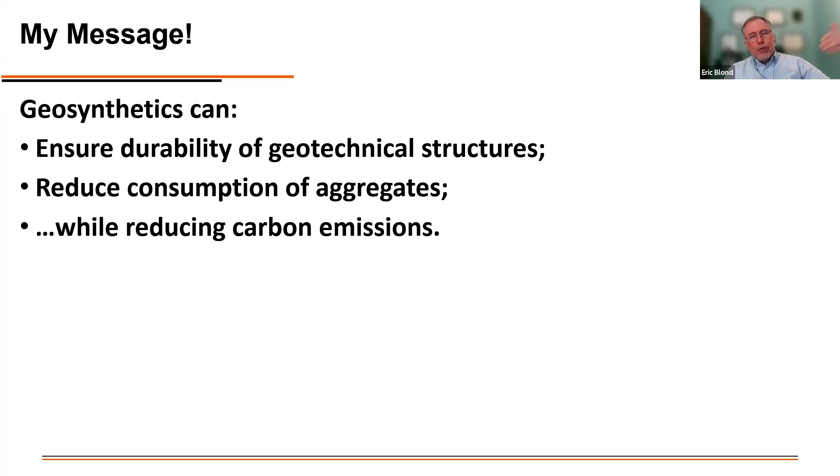Key message I'm going to try to transfer to you, so you know exactly where I'm going. Geosynthetics can ensure durability of geotechnical structures. They can reduce consumption of aggregates while reducing carbon emission. That's really where I want to take you today, with illustration, information, and more details.

Where do we start? We start by the fact that we are building infrastructure to deliver function, a road, a bridge, a wall, whatever. And if we don't do proper management of water in these structures, we will see premature degradation of these structures. Very often, engineering is focusing on bearing capacity, on strength.

We like numbers, we like kilonewtons, kilopascals, but there is the tendency to forget the water. Or sometimes what I've seen, which I think is even worse, is a drainage factor, to have a reduction of a modulus or a reduction of trafficability of something based on the quality of the drainage. This is not correct. Water shall be removed. We shall have zero saturation in a structure to make sure that it's going to perform well.

And then we design for it. We cannot play with numbers with water or no water. There must not be any water, period. That's a prerequisite, like we need to have a foundation to build a structure. We need to have no water in the structure so it can last. It's exactly the same level.

What are the effects of water on soils? Just going back to the basics, negative effects of water on geotechnical structure. If you have free water, if you have saturation, you're going to have some lubrication of the grains, and therefore you're going to reduce the strength, the shear strength of the material. So the bearing capacity is going to reduce just because it's saturated.

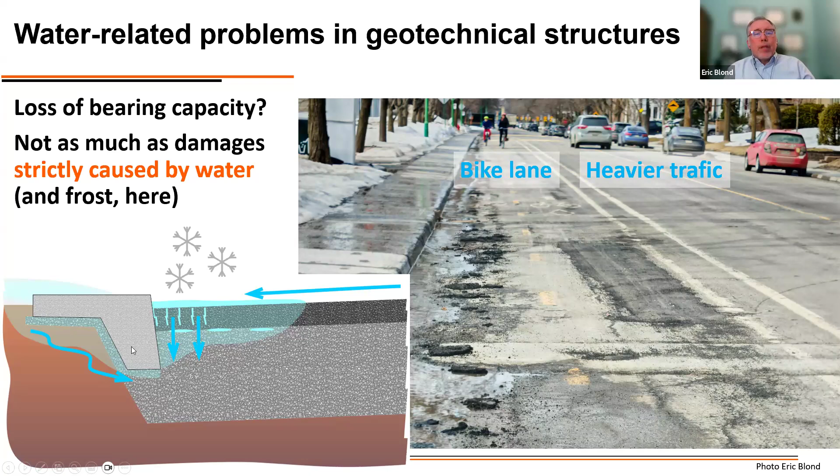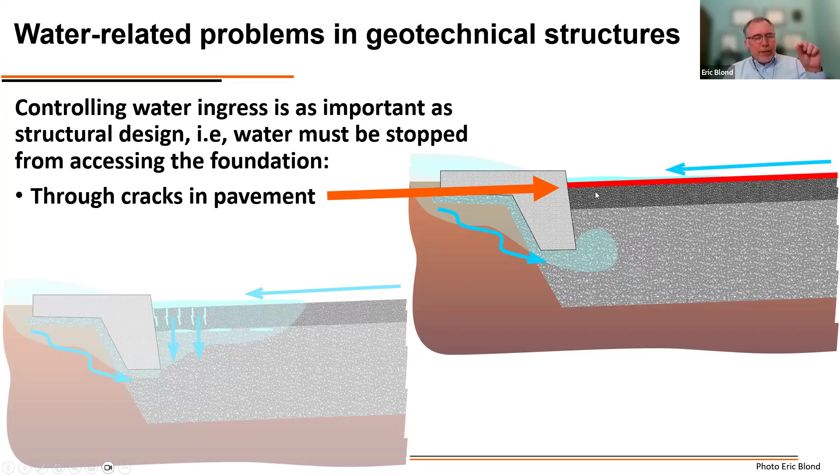So controlling the water ingress is as important as the structural design. As I said, water must be stopped from accessing the foundation. First thing first, we can install a sealing layer on the surface of the asphalt concrete. Or we can install 200 millimeters of asphalt, a very thick layer, or a geotextile or waterproofing layer that will seal the asphalt concrete. By geotextile, I mean paving fabrics, impregnated geotextile saturated with bitumen.

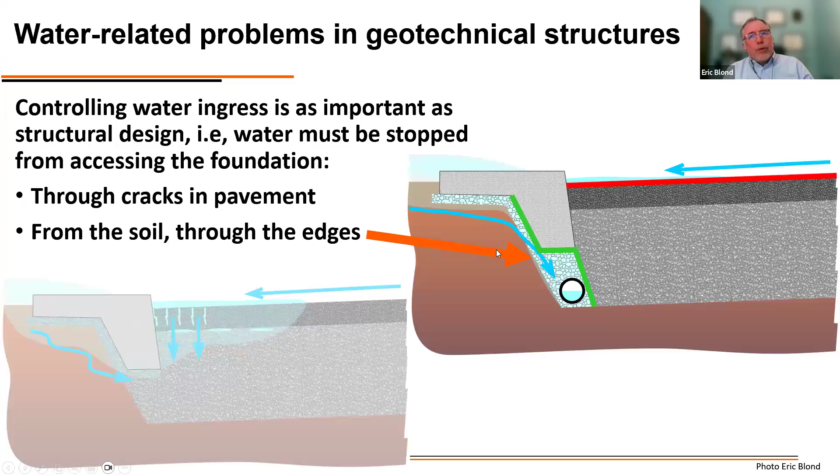Other solution to reduce the water ingress into the structure: drainage. So I'm drawing here a red line for waterproofing and a green line for drainage. And here we're having some drainage situation with gravel very often, but sometimes geosynthetics, where we're going to collect the water arriving from the sides to prevent entry into the structure.

Another important thing is that we cannot fail in one location. If we have one location on a structure which is degraded, like a pothole, the entire structure is degraded. The serviceability is reduced as a whole by a lot more than just the surface. A road with 1% of the surface exhibiting potholes is in bad condition. It's not 99% good condition, it's 100% bad condition because of 1% potholes.

Now, if we look at another type of structure, retaining walls. We design the walls - the structural capacity of this wall depends on the horizontal stress that will come from the soil behind the wall. And this stress depends on the properties of the soil with the coefficient of lateral earth pressure.

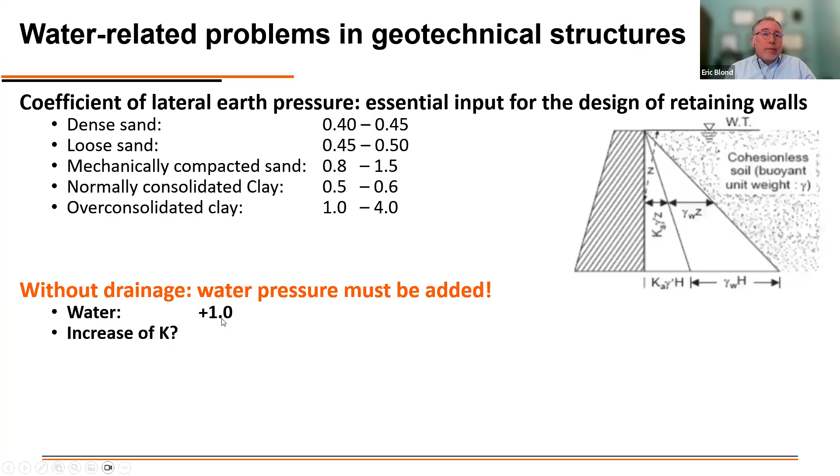However, if there is no effective drainage, this changes completely. So we can first add the weight of water, and the water may also affect the value of this coefficient. So that's how we get into some situations where the stress is increased by a factor of up to 2 or 3, and that may actually create some degradation of structures.

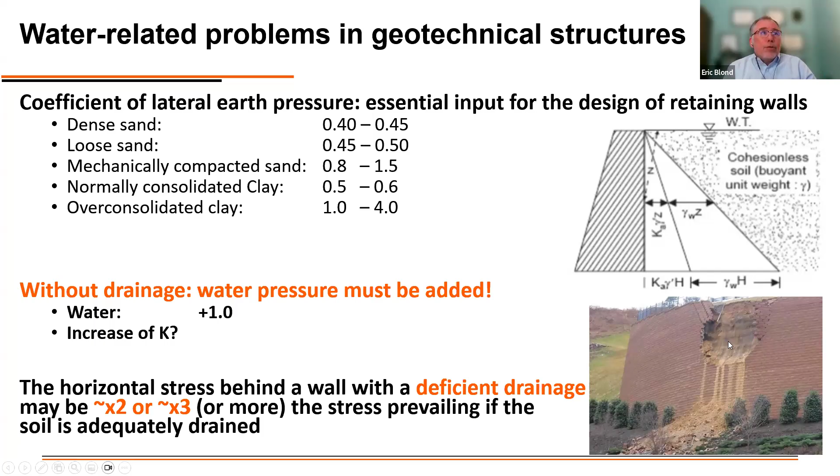There is a very good paper by George Koerner, which summarized research that involved, I think, between 200 and 300 situations. Some very important numbers are in there. Up to 2% of walls are actually failing. There are some levels of failing - not a complete failure all the time, but some level of dysfunction of the walls is observed for up to 2%, which is extremely high. It should not be that high.

Out of that, 64% of the failures are water related. Water can be many things. It can be plumbing, so a pipe with water circulating that breaks. It can be too much accumulation of water in the backfill. It can be whatever. But it's still 64%.

So that's really a good example of how the water can affect the performance, because I'm sure that all these walls were properly designed for reinforcement. It's typically not the reinforcement which is not strong enough. And in fact, in the paper, he indicates that no failure was caused by improper manufacturing of the geosynthetic used in the walls. It's really, really mostly about water and water management.

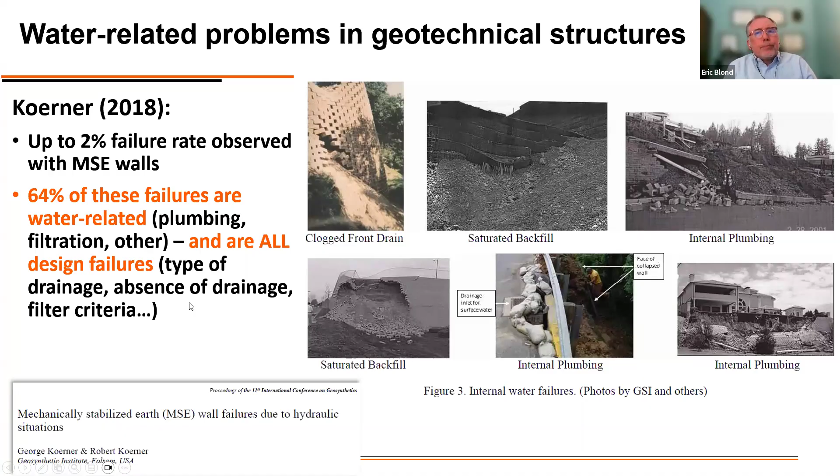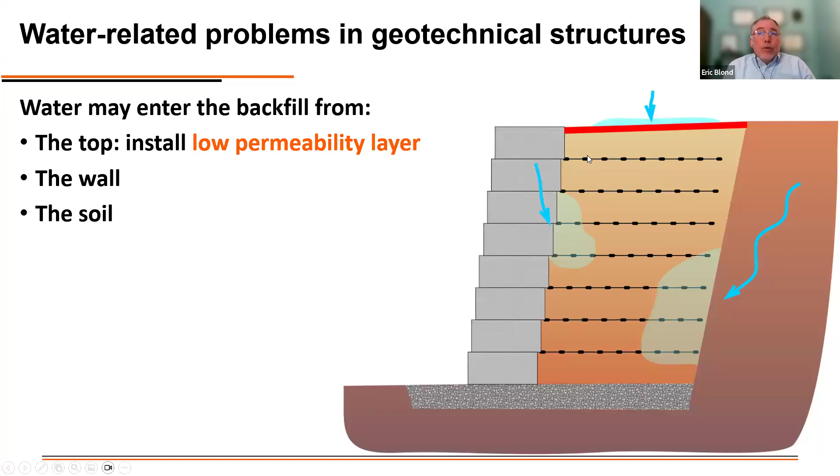So what do we have? Where do we have water in such structures? We have water which can arrive from the top, from the front wall, and from the back wall, essentially. So how do we do that? We have to install a low permeability layer on top. And on the walls, we can install drainage behind the blocks, which is typically going to be gravel, and some drainage geosynthetic, geocomposite in the back, that will prevent water entry into the region that must be stable.

Another type of structure where we can have water damage is cover soil on top of geomembranes. When we have a slope, the porous soil, especially after construction where there is no vegetation, is going to accumulate some water. Water will infiltrate into the structure, and if there is no adequate high flow component on top of the geomembrane, water will accumulate there. Eventually the saturated region coming from the top of the soil will meet the water table on top of the liner, creating an entirely saturated region that will be eroded and can fall down the slope.

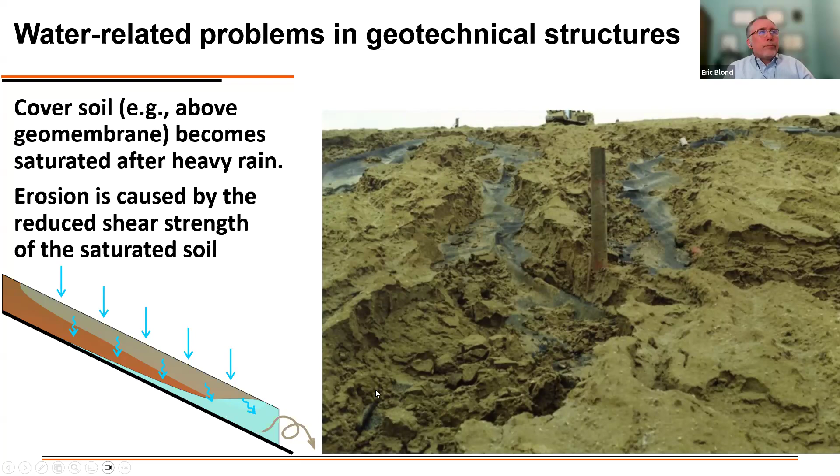To prevent that, we must have a drainage system. This is well known for such structures, but still it's one of the typical situations where we need a drainage system.

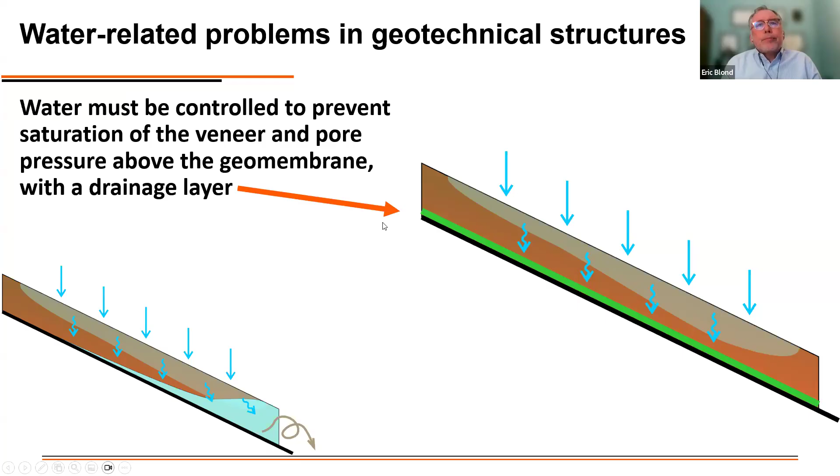Another example of failure is internal erosion. There are plenty of situations where internal erosion leads to failure of a structure. This one is a massive, huge one that took place a long time ago, about 30 years ago. What happened here is that a concrete structure was built, and compaction of the soil near the concrete structure was very difficult to do. So some piping started to develop around the structure, increasing the gradient, and that was a progressive erosion that led to the failure you can see on the right.

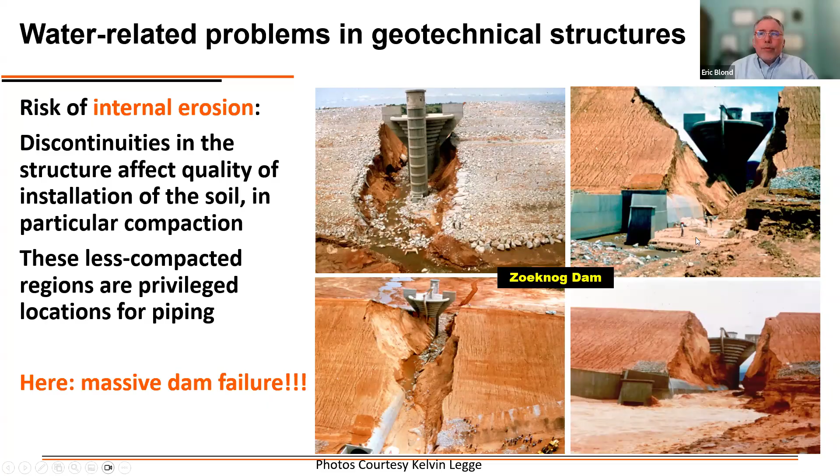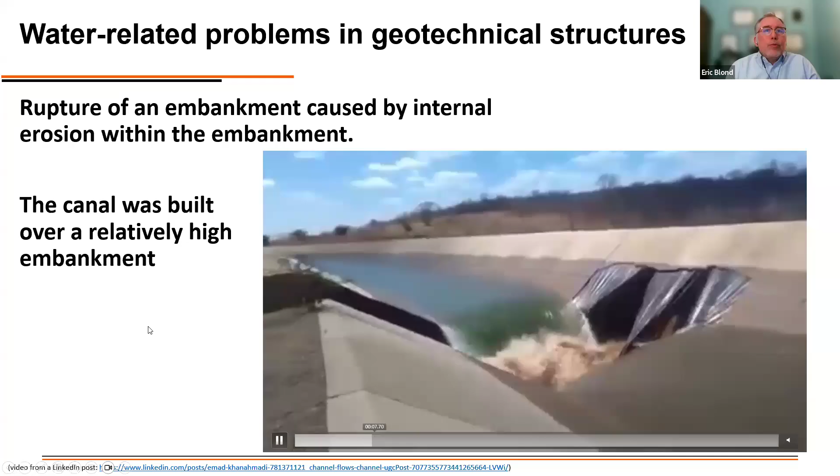Now I have a nice video to show you of a failure of a canal that was built. You see the water falling, so this canal has been destroyed. Obviously there was a hole into the geomembrane. What we see here is that the canal was built on top of a relatively high embankment, and there was no drainage underneath. So what happened? A simple, very small leak in the geomembrane, because there were a couple meters of water,

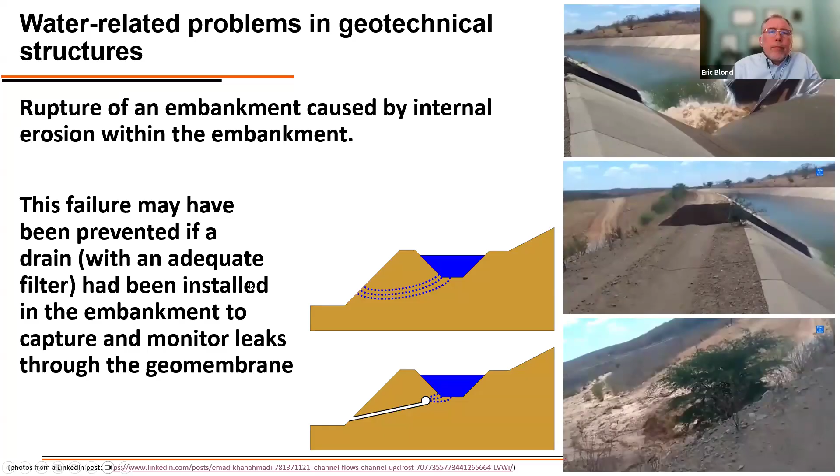So internal erosion of the soil is a problem which must be controlled, but we can also have surficial erosion. Erosion usually starts very slowly - some water takes a little bit of material, and it doesn't seem important, but it progresses, accelerates, and eventually you get to a situation where the soil has disappeared. With the rise of sea level, climate change, and its effect on the intensity of rains, those situations with surficial erosion will increase a lot.

As a parenthesis, in Quebec we have a situation where floodable regions have been updated, and this has a tremendous effect on insurance cost. Some regions cannot be insured anymore, homes cannot be insured anymore. So a lot of people will be in a dire situation because of this change in conditions - erodibility, flooding, etc.

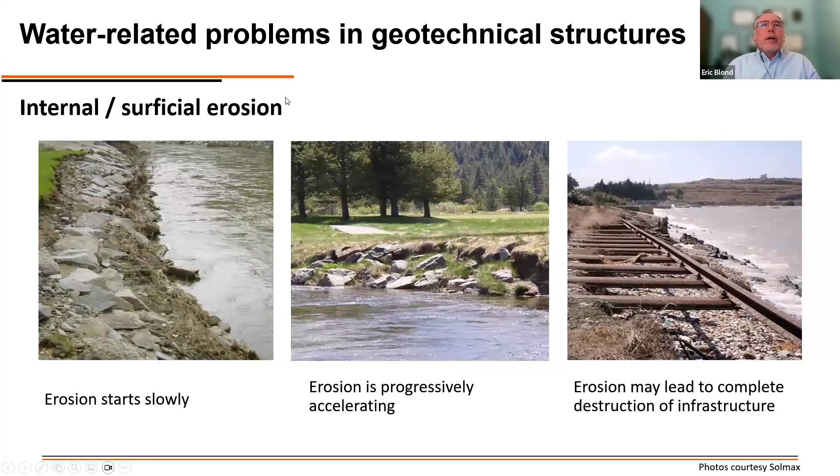At the end, what's important is that when we design a structure as engineers, what is absolutely critical beyond adequate sizing - which is the obvious thing to do - we are engineers, we do size structures, but what we must never forget is to analyze where the water is, where it's coming from, and make sure we eliminate entirely any free water in a structure we want to last, or at least control this water. We prevent excessive pore pressure and we prevent internal erosion. This will absolutely affect the durability of these structures.

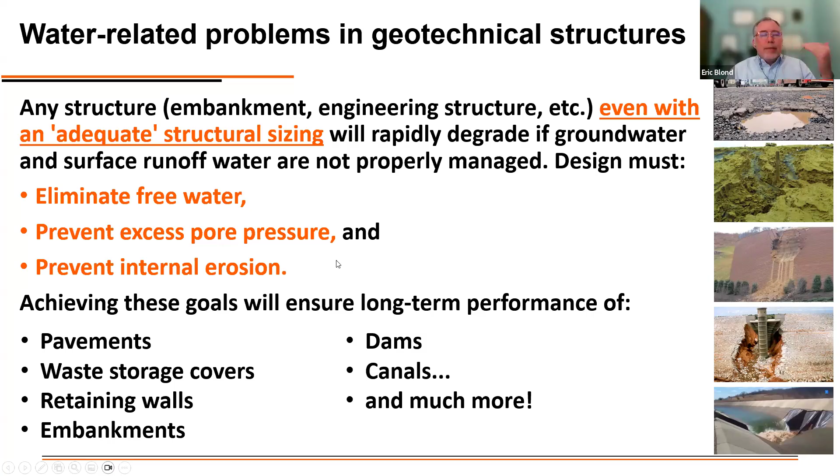In fact, as I said a bit earlier, traffic in that case has no real impact on the rate of degradation. What has an impact is the presence of water. It's only the presence of water.

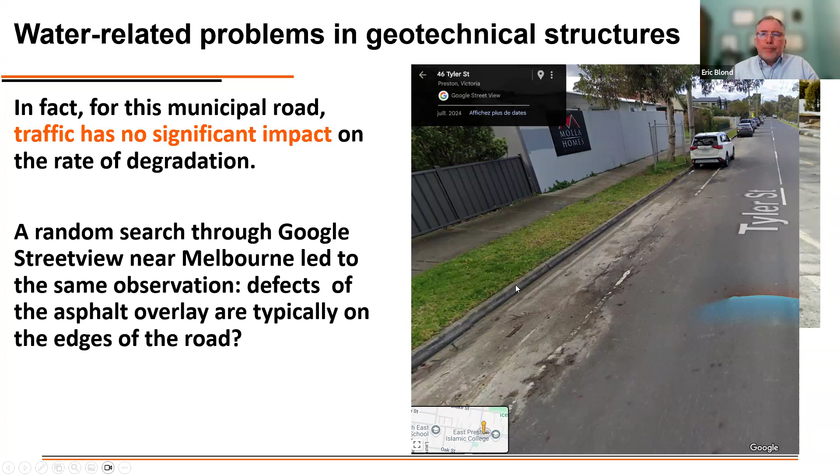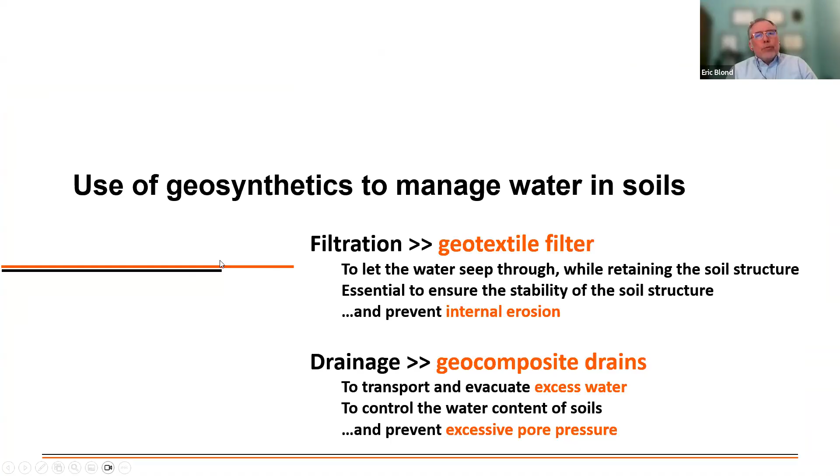So we have geosynthetics. That's fantastic. We're going to be able to use these products to address the water problems that we observe in soils and in structures. The two things that we do that we're going to focus on are filtration and drainage. But before I get there, I want to show you something that I've analyzed on what are the function and the role of geosynthetics in structures.

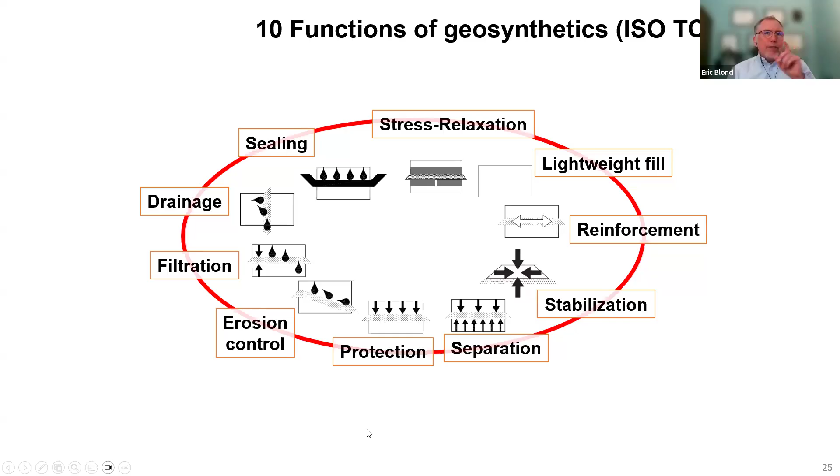If I look at ISO TC 221, the work group 6 has defined 10 functions for geosynthetics. I put them, it's not random, I put them in a very specific order around this circle to look at how we can coordinate everything. First thing, I put geotextile. How can we distribute geotextiles around this round of functions?

So we can see that woven geotextile can do stabilization. I should start here. Geotextile filter can do filtration. Geotextile cushion will do protection, separation, obviously. Woven geotextile can do stabilization. Paving fabrics, so saturated geotextile, bitumen saturated geotextile will do sealing, and we can have stress relaxation product, stress absorbing membrane interlayer. That will also help with the performance.

Now we have drainage products. In blue here, geo-drain, geopipes. We have for sealing geomembrane and GCLs. I could have put them in two different boxes, but it's not really important. For geogrids, we can have geogrids that will do reinforcement and stabilization. Geocells that can do stabilization as well as erosion control. Erosion control mats and blankets can be obviously used for erosion control as well. And we have geofoams for lightweight fills.

What I realized is that, in fact, we have three categories of function. One is water management, and it's a big one. Another one is structural integrity of the structure. And the last one is structural contribution. And in fact, if I harmonize the color codes, we can see that in green here, I've put everything which is about preserving the structure, preserving the integrity of the structure, making sure that the structure is not moving, there is not too much rutting, we control the erosion, etc., etc.

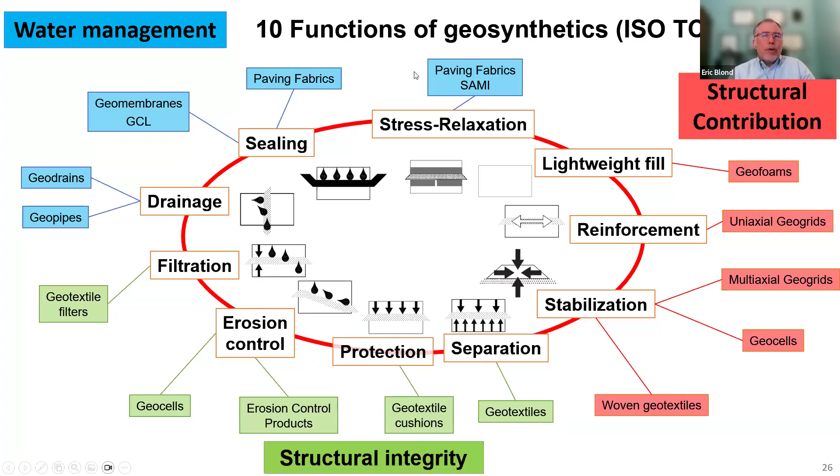So it's really about protection. Another one is water management, and water management includes both drainage and sealing, obviously. We are controlling the water. We stop the water and we remove the water. And the last one is the structural contribution. So in fact, we have three categories of products with geosynthetics. And what I'm going to discuss today is really focusing more on water management and somehow on structural integrity, which includes filtration, as I will explain just now.

So when we use geotextile for filtration, what we want to do really, it's not about water. It's not about water flow. It's about preserving the integrity of the structure. We want to retain the soil skeleton. So the soil skeleton, which maybe it's important to precise that the soil skeleton is the type of grains within the soil which are used by the stress to be transferred from one side to the other.

So that means that what is not the soil skeleton, if it's lost, like we can see here, those two cavities here, it is lost. The particles are not there anymore. They have passed through the geotextile, but the coarser material, the skeleton, is still there, which means a stress can still go from this location to that location, and that means the structure will be preserved, will function properly. The water can flow. We have now a very porous area here, and so the water can pass through no problem, but the soil skeleton is preserved.

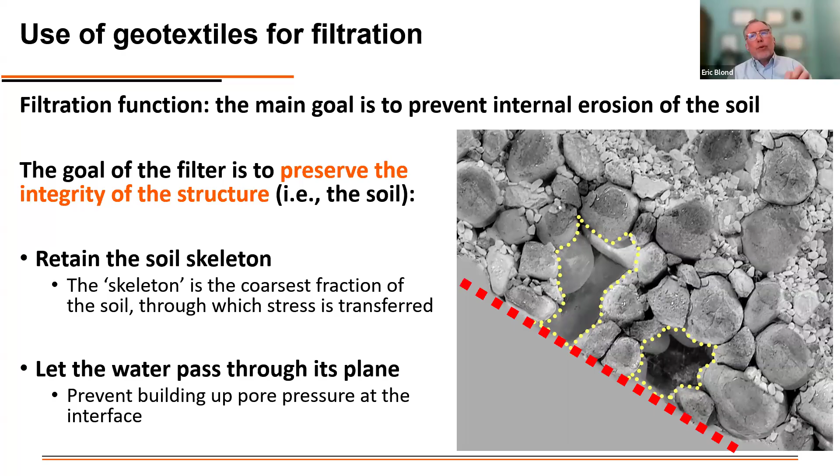So with that, filtration is really an integrity function. We are preserving the integrity of the soil structure, and we're letting the water pass through the fabric. When we use geotextile for drainage application, we're going to typically use French drains. So that means we have a geotextile filter, we can see on the right here, which is used in combination with aggregates in that case. So the aggregate is the water transport function, while the geotextile is a filter, which ensures preservation of the integrity of the soil.

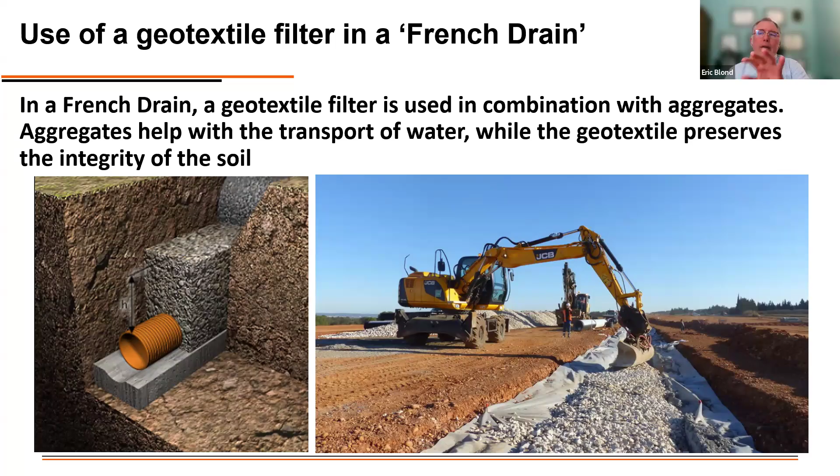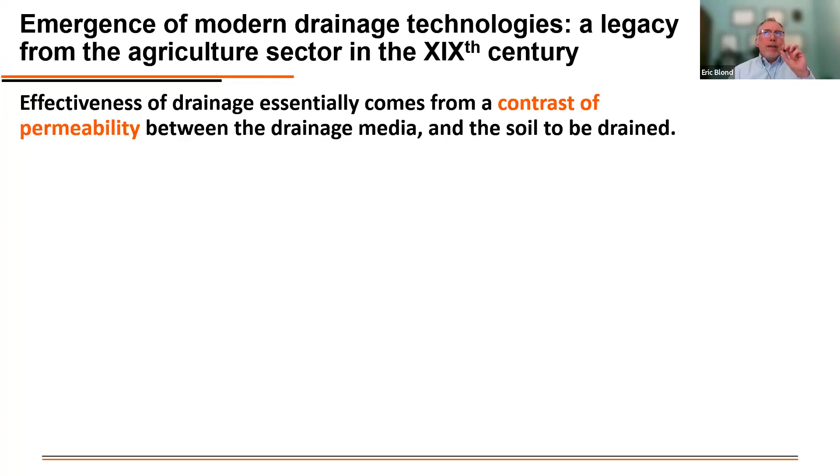Putting a channel here would lose a lot of land, and especially at a time where everything was done with horses and oxen, you don't really want to have so much space wasted—that's more transportation, etc. So he found that putting some tiles and covering them with straw would provide an excellent solution for draining water and lowering the water table in soils, and that was the way to go.

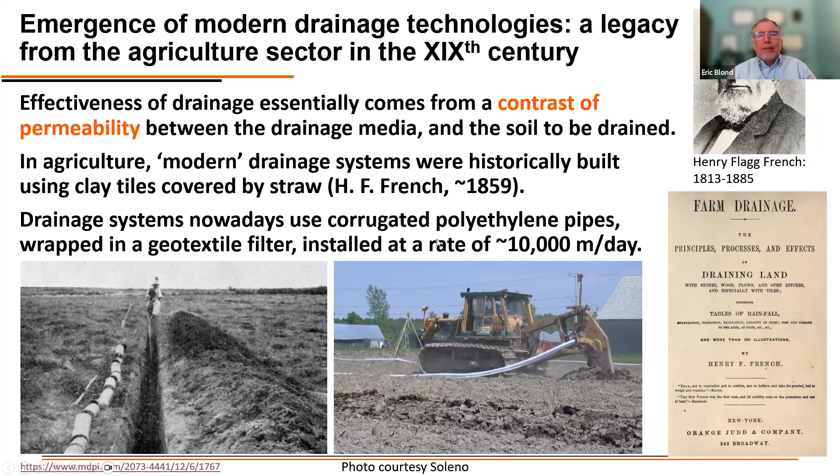So that's really the origin of the modern drainage system. Now let's look at what's happening in dams. I use a dam because it's an interesting application—dams are probably the most critical application with respect to water management. We want to contain water, so the purpose of a dam is to contain water, and we want to make sure the water is not going to destroy the dam. So all the design of a dam is based around water management and erosion.

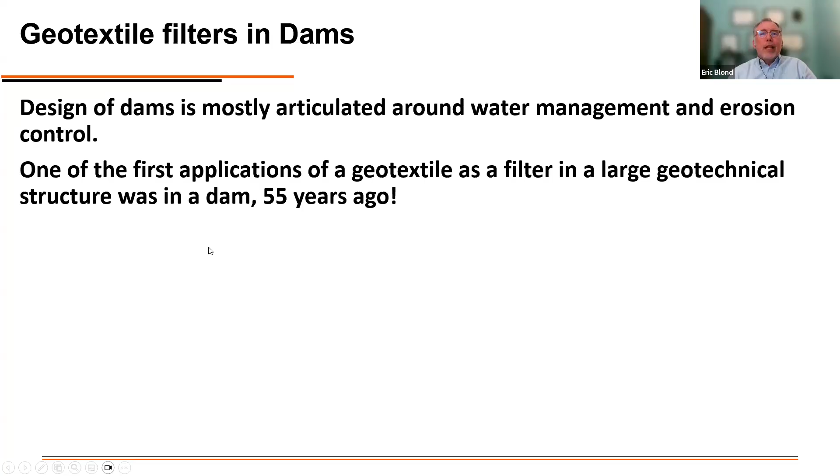And it happens that it's also the first application of a geotextile as a filter, and that was 55 years ago—I was one year old when the first geotextile was installed. So this was the Valcros Dam in France in 1970.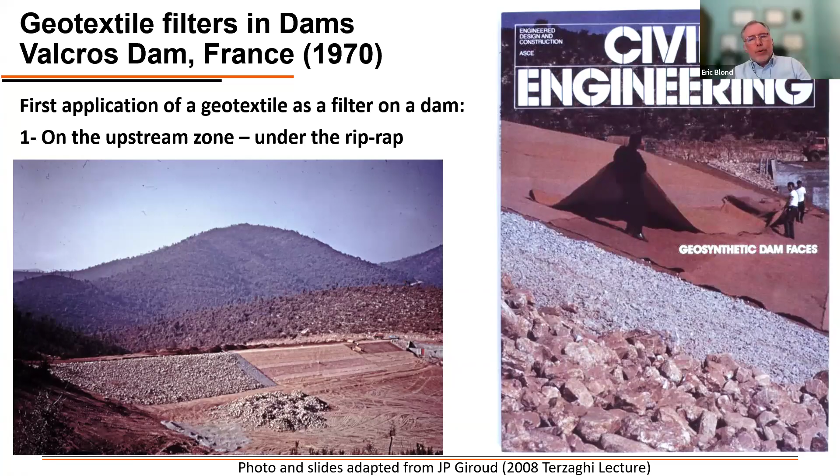There were two applications for geotextile on this dam. One was on the upstream face, where it was used under the riprap. By the way, I insist that the photos in these slides were given to me by JP Giroud—they come from the Terzaghi lecture, which is extensive and must be read by anybody working in filtration. So these photos come from that lecture. That was the first application, under the riprap.

The second application was at the downstream drain. We can see here the limit of the downstream zone of the dam before the embankment was actually built, and here you can see the geotextile being installed—this photo is from 1970. We can also see additional finger drains here. This dam is 17 meters high, a homogeneous structure, and it has been in service since 1970.

Another interesting aspect: the reason geotextile was installed here by JP Giroud is that he was not able to find adequate sand. There was no sand around, so he would normally have used sand—that's what you do normally, especially for a dam—but there was none available. That's what led to this innovation, and in fact the first use of geotextile as a filter in a large structure.

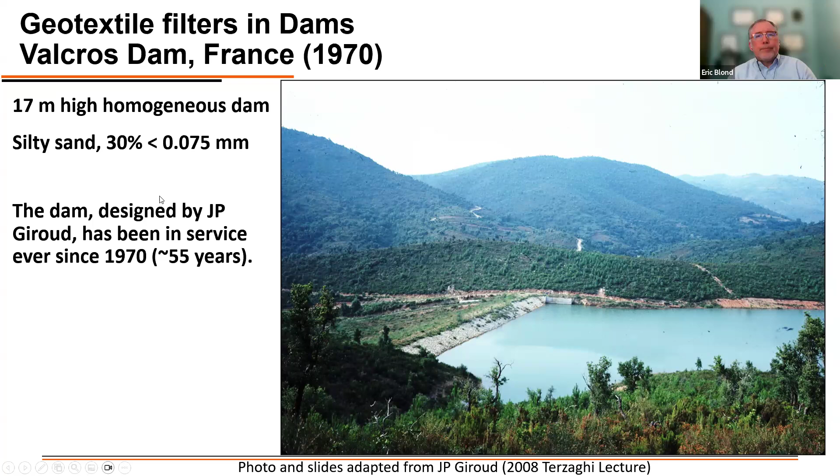Now, another thing which is interesting for this very large structure in particular: soils do not have tensile strength, which means if there is some displacement—like the structure I showed earlier with a massive failure on the dam—you can have cracking appear in the soil because of the lack of tensile strength. Through cracks in the soil, you can have piping and erosion developing. This would not happen with geotextile filters, for the simple reason that geotextile filters can elongate.

So it's a very basic property—we can pull a geotextile and increase its length by typically 50%, up to 50-60% for a non-woven geotextile. That will affect the properties probably, but it will not break it. It can support some level of elongation, which means piping becomes extremely unlikely when you use a geotextile.

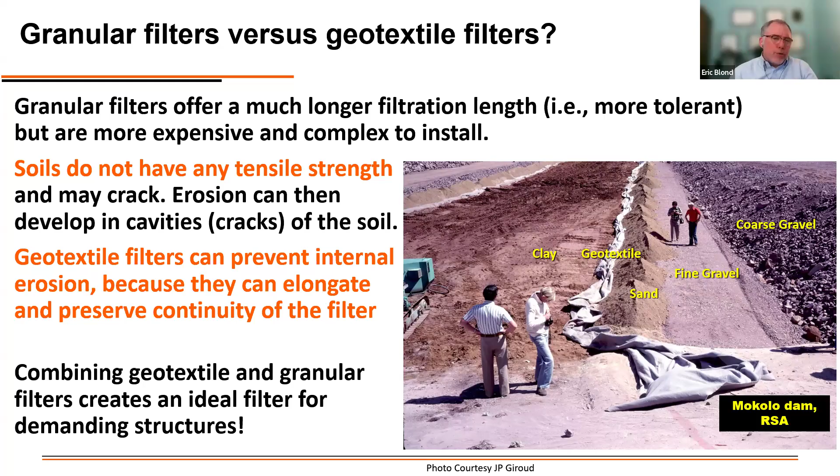Clogging is another problem, obviously—you need to do adequate design of the filter and installation, but piping through cracks of the soil is becoming extremely unlikely. So combining granular filters with geotextile filters in those structures sounds like the way to go. Geotextiles at the end are really ideal materials to prevent internal erosion and to preserve the integrity of geotechnical structures. That's really the important part—preserving the integrity of the structure.

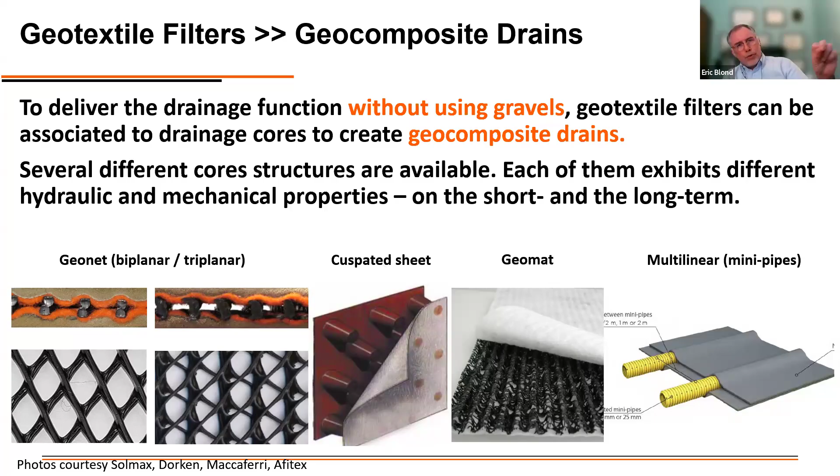Now, once we have these geotextile filters, we've been doing innovation for 30 years and have developed geocomposite drains. We assemble together different products—geotextile filters and a core—which gives us a product sold on a roll that can be installed and provide both the filtration function and the water transport function. That's a very interesting aspect.

How can we use that in roads, for example? I presented earlier this situation where a road can degrade because of excess water, so let's stop this water. We can install—you can see here—a geocomposite, which in that case is a very thick non-woven with very coarse fibers.

It's a 3-layer product: an edge drain, a non-woven edge drain, which is connected to a pipe. This product will stop any water from entering the structure, so that's a very effective way to prevent that.

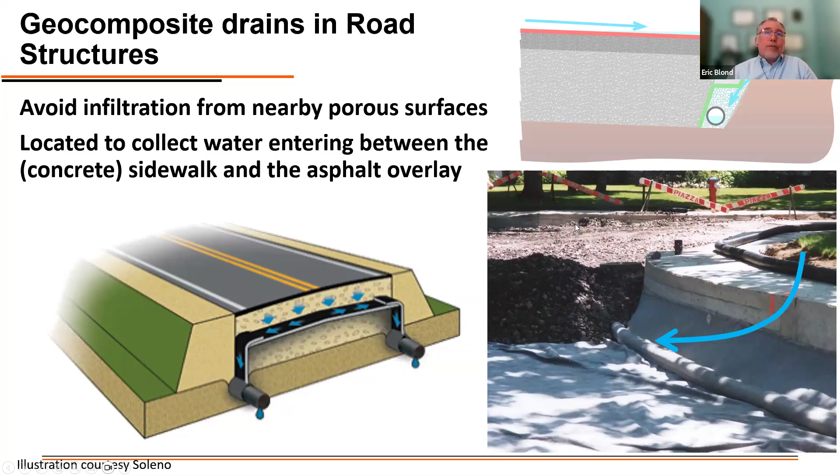This photo I took in 1998, on a project I did at that time, with instrumentation and everything. I looked this afternoon again on Google Street View to see what was the condition of this road after 20 years.

It's interesting to see that with these edge drains there is no degradation. The road after 20 years obviously has some cracking because it's Canadian winter every year, so there's contraction of the asphalt, movement, traffic, etc. That's normal, but there is no more cracking on the edges. The road overall behaves relatively well because of the absence of water entry from the side, because of adequate water management. If any water enters through the asphalt and concrete, it falls immediately into the drain—no circulation, no accumulation, straight into the drain. That's really the best possible location for it.

So that's where it's installed. It's not the exact same location—you can see here there's a sidewalk, not here, but it's the same street. As a reminder, I present this structure where there is no such edge drain. I was not involved in construction here, but it's less than 20 years old and it is completely degraded—just to show the interest of these edge drains for preventing water entry into the road.

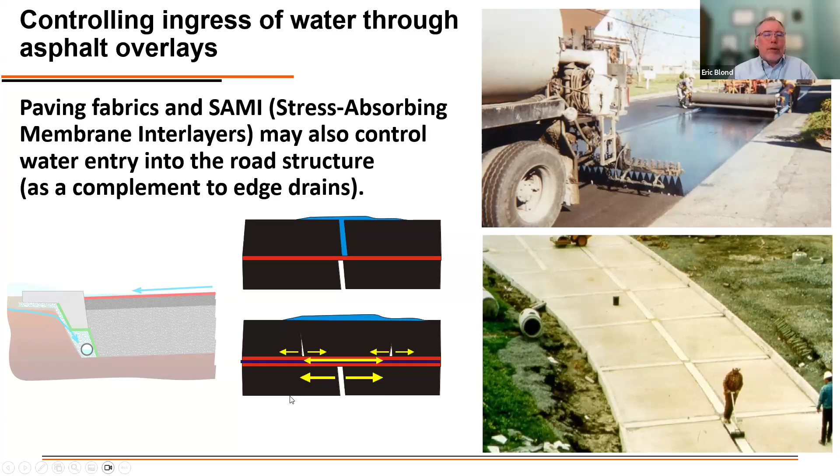Another interesting product is wicking geotextile. If there is free water in the foundation of a road, in the granular material used as foundation, the hydrophobic nature of the polypropylene that constitutes the geotextile is likely to affect the effectiveness of an edge drain to remove water from inside the foundation, especially given the very small hydraulic gradient. You'll typically have around 2% slope on a road, so if water has to travel 9 meters through medium to low permeability gravel to reach a drain on the side with a 2% slope, it's going to take forever—so a cracked pavement will be a problem.

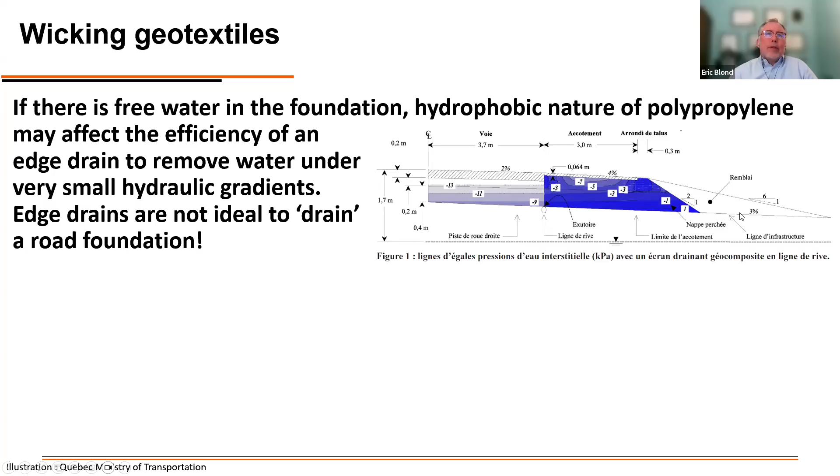Using a wicking geotextile will accelerate this transport. Another interesting thing is that you don't need to reach 100% saturation near the geotextile—it will remove the water immediately, as soon as there is enough water near it. Here's an example from one of the papers published introducing this technology in 2022: you can see a clear difference between the region with a wicking geotextile and the region without—it has effectively removed the water from the top layer.

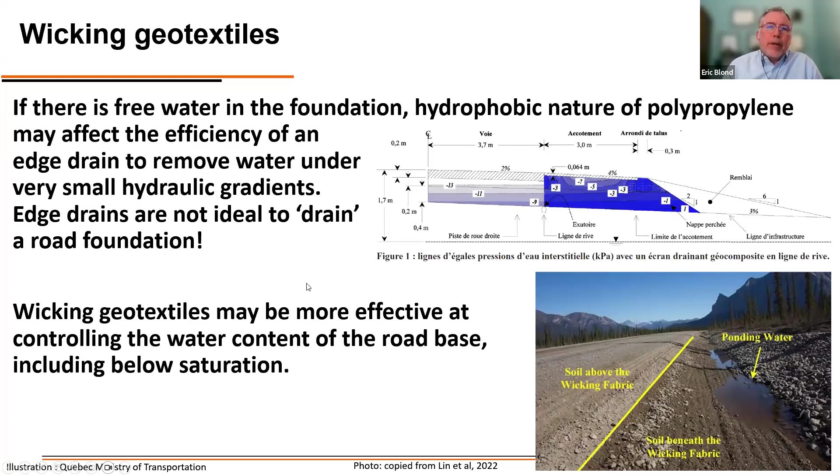In retaining walls, similar considerations apply: the drainage layer removes excess water from the soil. But here we have much higher gradients, so we're not in the same logic as with roads—we have high gradients, so there will be flow through the polypropylene or whatever material. It's not at all the same problem.

The geocomposite, or drainage layer in general, removes water from the soil and can act as protection for the concrete wall. This is especially important if you have frost, because you don't want any water on the concrete—concrete does not like water, and concrete exposed to water will degrade very fast. Having this drainage blanket near the concrete protects it and extends its service life.

A very practical thing is that it can be installed on an essentially vertical wall. Installing gravel vertically is very hard—it can be done by layer, but it's difficult in general—while installing a geocomposite is easy, without any problem.

Mechanically stabilized earth walls, similar situation. We usually put the drain in the back for convenience, and also because the drain cannot interact with the geogrid. The geogrid is going through and has to be anchored on the blocks, so you cannot put a drain in that location. It's still gravel used there, usually, unless the structure itself offers some drainage capabilities.

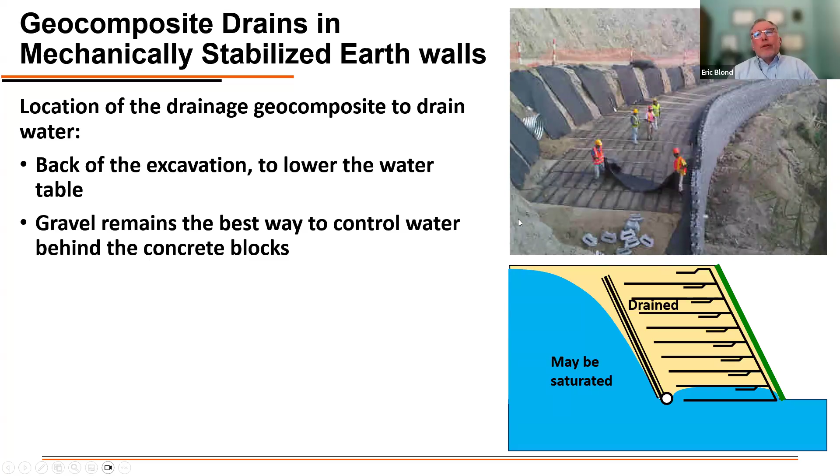Geocomposite in environmental containment is used for several applications. It can be used as a secondary drainage layer, as a complement to the drainage layer, and it's an excellent cushion to protect the geomembrane. It's not only that they deliver drainage capabilities, they also offer an effective protection layer to prevent puncture of the geomembrane. It's definitely a combination that works very well together, geomembrane and geocomposite.

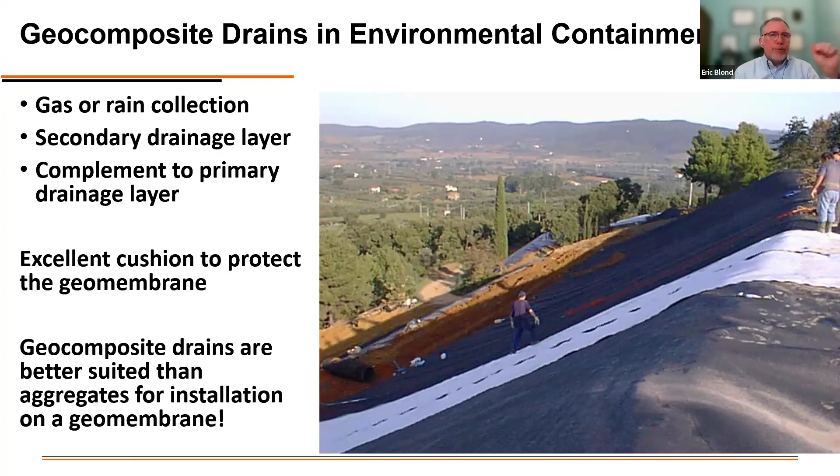There are some questions about the service life of these products in environmental applications. What's important, and sometimes omitted, is that the service life required for a drainage layer depends on the application. As an extreme example: if you use a geocomposite on top of a geomembrane as a primary leachate collection layer in a landfill, the first thought is, oh my God, there's going to be biological clogging, it's going to be a disaster, it'll be clogged after 3 months. And I'll answer: yes, it may be clogged after 3 months, but we don't care a second.

Why don't we care? Because the design of the hydraulic layer is done for the most critical scenario, which is when there is no waste at all in the structure. As soon as you start to accumulate waste, the flow of liquid reaching the drainage layer, even during a big rain, is going to be reduced tremendously because of absorption in the waste, the delay in water transport through the waste, and evaporation, runoff, etc. So as soon as you put some waste in, you reduce the need for drainage tremendously.

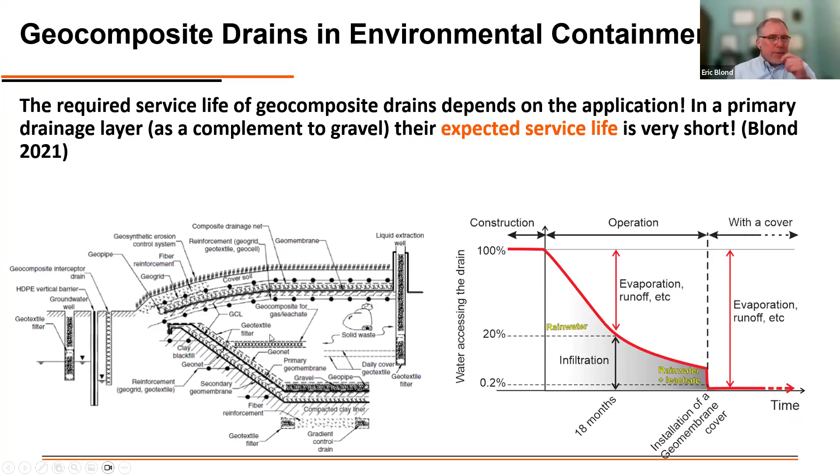So really, geocomposite drains and geosynthetics in general are the way to go for these applications. But I want to step back and ask why we even need to discuss this. If we think about it, mankind has been managing water for the last 10,000 years. There's evidence of water control structures that are 10,000 years old. In India, in the Indus Valley civilization, there are artifacts of structures still working today that are 4,000 to 5,000 years old. This has been working very well, and we know how to do it.

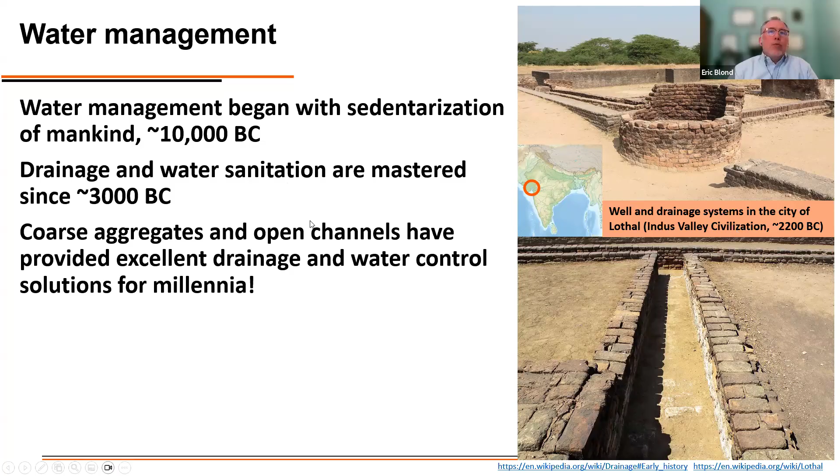I'll focus on another example, in Italy: the Via Appia. This road is still used today, and it's 2,000 years old. We knew exactly how, at the time, mankind knew exactly how to do this construction. We had a very good understanding of how to manage water, through trial and error, whatever. It wasn't engineering, it was just, we need to remove the water. They were doing what we should be doing today. And this was long before geosynthetics were invented.

So I'm not going to pretend geosynthetics are the only solution to control water, it's just one of the solutions. The question is, how much of these materials do we have? How much aggregate do we have? Because what we have to realize is that aggregates with the adequate quality for construction are among the least renewable resources on Earth.

I'll give an example that I like, which is near my home, near Montreal. It's a rock. Montreal is built in a rocky area in the middle of the St. Lawrence River, which is in the middle of what used to be the Champlain Sea.

It's a clay deposit, with a few rocky areas every 20 kilometers or so. There's a few of these areas. You can see this hill, which is very nice. Spoiler, there is a quarry in the middle. On this hill there is a national park. Believe it or not, the top of the hill is a national park with rare protected species, and we are protecting wildlife here.

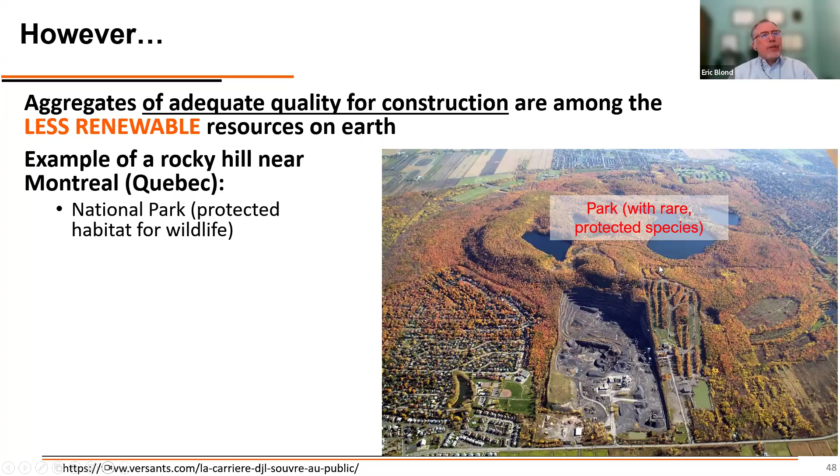There is a residential area, actually quite wealthy, a nice neighborhood. There's another residential area here. There's a ski resort. The hill is maybe 70, 80 meters high, but it gives an opportunity to do some ski. We can drive there and be there in 10, 20 minutes.

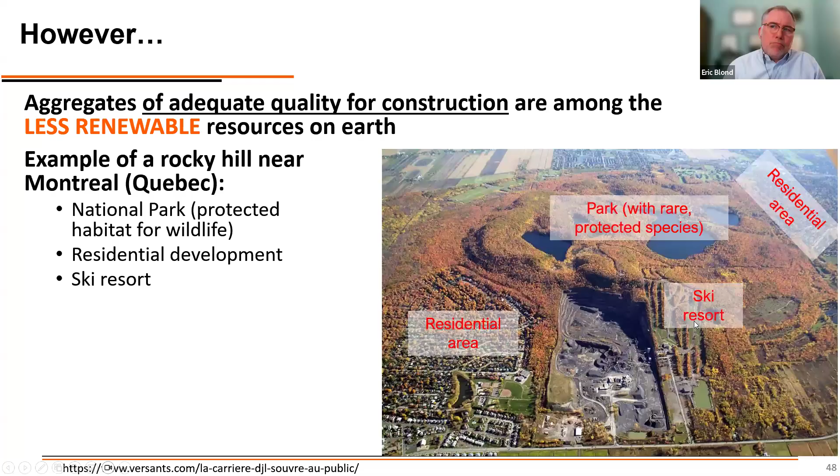And in the middle there is this quarry. Obviously there is not much time left. All this is on the same very small footprint. Extraction in this quarry was started less than a century ago, probably more like 80 years ago. I don't have the exact number, but it's not very long.

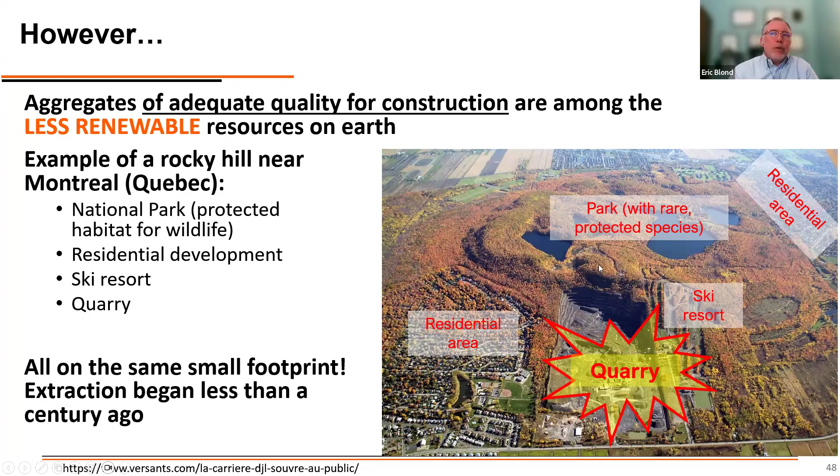This quarry is at the end of its service life. So when we're done with that, we have to think: are we going to open another quarry here? Are we going to ask people to move? Are we going to cut the ski resort? Are we going to use another of these few mountains we have in the area? There is a limit to what we can do.

One thing which is important, and that not everybody knows, is that to have sand meeting the specification to build this magnificent tower, the only sand that would meet the specification was in Australia. So they had to transport sand from Australia all the way to Dubai by boat to build this concrete, because none of the sand available in Dubai offers the adequate properties. The sand they have in Dubai is good for anything else, but not this type of concrete construction. So it's important to realize that there are aggregates, and there are aggregates which are suitable for construction — those are two different things.

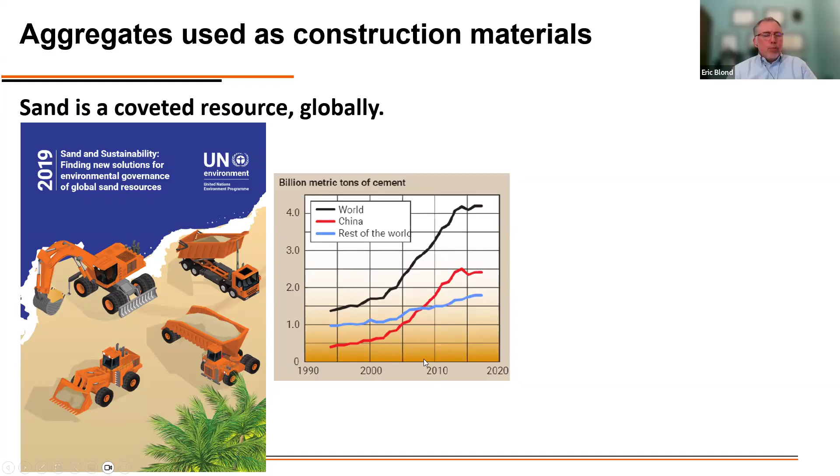And in fact it's not something new. There are numerous reports and information available on the fact that sand has become a very coveted resource. With the global increase of wealth in the world, the quantity of sand and the number of constructions being developed is increasing at an incredible pace. You can see here that between the mid-90s and now, the quantity of cement, and therefore sand, used around the world has almost tripled. We cannot ask these people to stop building. It is the clear tendency.

What is the consequence of that? Because the costs are going up, because the need is going up, there are some mafias developing for sand. Again, this isn't a ChatGPT creation — there's a report available online on sand mafia and how it affects the economy. What's happening is that there are protected areas for wildlife, for natural preservation, and some people are just going there and illegally removing sand from these locations. So it's illegal exploitation of sand, which creates tremendous side effects — not only a question of taxes, but of preserving wildlife and habitat for different species, etc.

All the economy around this is well known, but it's going to continue to happen because that's how things go, and there is a cost involved, etc.

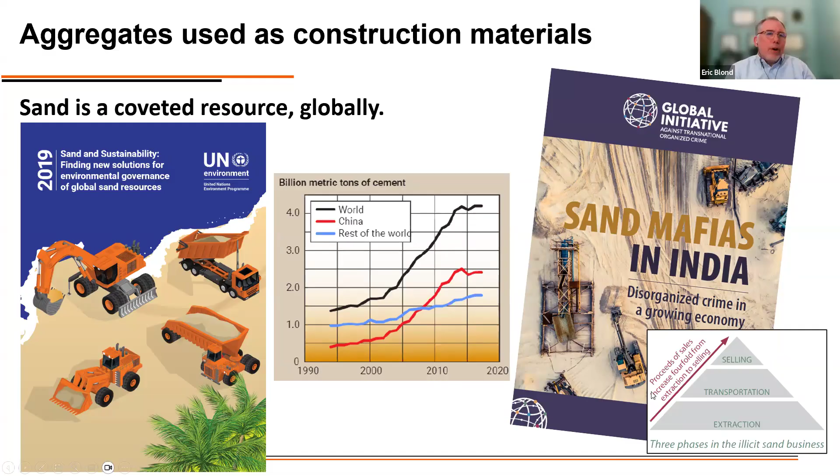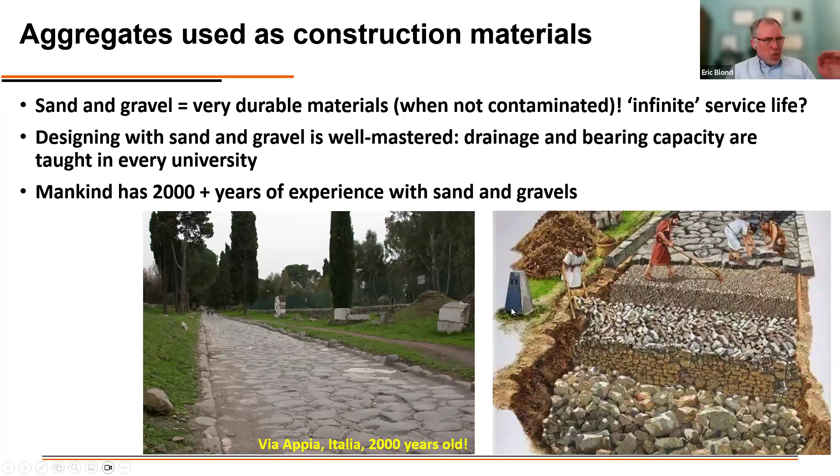So let's go back to our situation. We have sand and gravel. We understand it's a scarce resource, but we're good engineers, so we say: okay, I'm going to build a structure which is going to last 1,000 years, because we are capable of that. Romans were capable of it, we're capable of it as well. We know exactly how to build with sand and gravel. So it's not really a question of can we do it — yes, we can, no question. But there is a problem.

Our needs are changing. This is the Via Appia, which was built 2,000 years ago. Practically, yes, a car can go on that road. But this is Rome today — these cars will not go through this road. It is not going to happen.

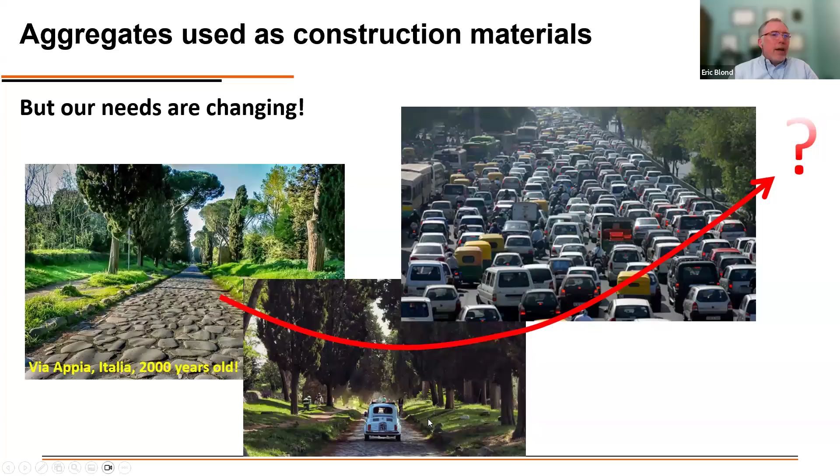We have no idea what tomorrow is about. Our needs are constantly evolving, but we don't even know in which direction they're going. We know the population is growing, that's a fact. We know the weight of vehicles is growing, so the structure must be thicker, obviously. The speed is changing, in some regions going up, in others going down. We have electrification, we want to remove gas cars, we want electric cars. So we're probably going to have some changes in the technology for transportation.

We have public transportation. Why not take the bus? Why not take the bike? I bought myself an electric scooter, I love it. I don't use my car in town anymore.

There's the long-term effect of the pandemic. Anything can happen. Now we work remotely, I work from home, many people work from home. Nobody is using the roads as before. So some trends are going up, some trends are going down, and that's going to affect how we have to build roads.

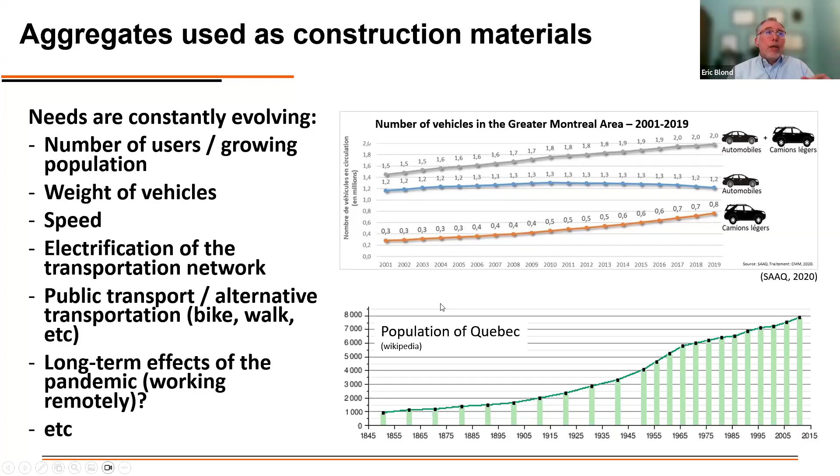Long story short, our needs are constantly evolving. It's not necessary to build for 1,000 years, because all the infrastructure we're going to build will be obsolete in a short-term perspective. There's no other solution. Everything is going to be obsolete eventually.

However, the quantity of aggregates that we have available remains the same. It will not change. We have a fixed number of aggregates which are qualified for construction that can deliver the properties that we need for construction.

Other practical aspects - let's say we forget everything about that. I showed you that every quarry will eventually be empty. It's a bit hard to value an empty quarry. Let's say we decide to sacrifice this hill here - we still need to find another one, and this is now a dead area.

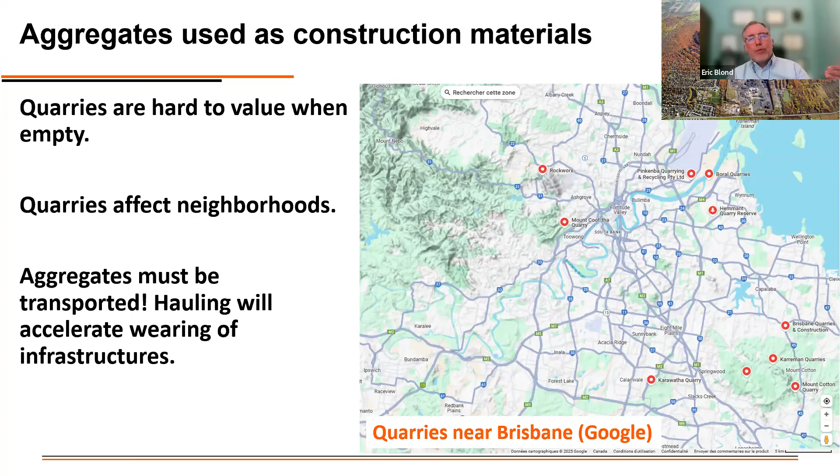So at the end, in the short term, what will define how we build infrastructure is first performance and cost, obviously, because we are engineers. Any engineering work has to work, and it has to be at a good price. There's no question there.

I'm not dreaming. Second aspect, we must have some approach that will favor a sustainable use of aggregates. We must preserve the ones we have for future generations - maybe find a way to recycle them, etc.

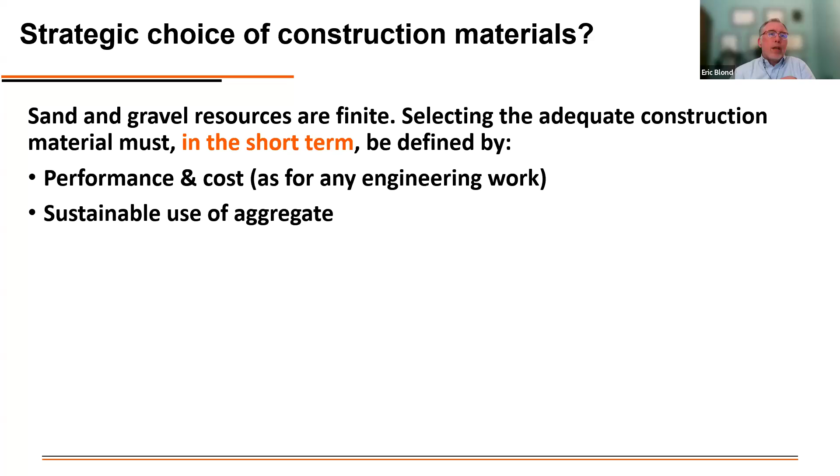And the last thing, not the least, is carbon footprint. I think most people realize we are on a significant trend regarding climate change, so we need to take care of that, and carbon effective solutions will have to be favored in the near future. Politically, it's not the dominant trend right now in North America, but it is dominant elsewhere, and it will have to spread around eventually. There's really no other choice.

The wildfires we are observing in North America, the hail event that cost $5 billion last year, wildfires in California that went to, I think, $48 billion as a cost for insurance companies - eventually people will wake up. There is something to do.

So now the next question is, how can we, the geosynthetic industry, help reduce the carbon emissions arising from construction? I have only 5 minutes left, so I'm going to try to be effective here.

Greenhouse gas emissions in the construction industry, I've estimated looking at the report for Canada. Canada has a very good report on carbon emissions. We're probably one of the worst, but the report we made is very good. It's hard to pinpoint exactly the emissions for a specific sector because they make sure nobody is directly identified, so it's always groups. By regrouping information, I've estimated that about 5% of all carbon emissions corresponds to construction activity. I exclude mining because it's a huge component of that.

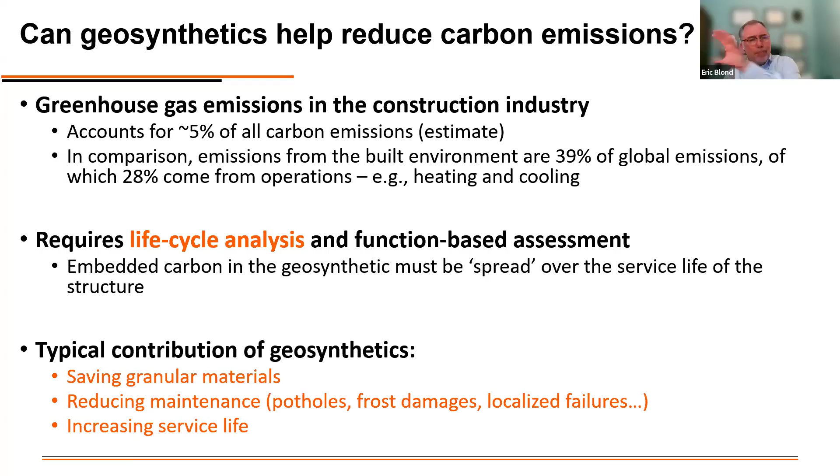To do a carbon analysis, we must look at the life cycle of the structure. We must investigate how much carbon was used to build the structure and see how long it's going to last, which gives us information on the life of the structure. In this environment, the typical contribution of geosynthetics will be to save granular material, and we'll see that it has an impact on carbon. It also reduces maintenance, which increases serviceability and eventually increases service life. All of that will have an impact eventually on the carbon. So, very quick carbon footprint.

How do we account for that? First, I'm going to use the term A1 to A3, which is for manufacturing, from cradle to gate. A1, A2, A3 covers extraction of the resource, refining of the raw material, transportation to the next plant, production of the resin, extrusion, etc., and we get to the gate. The gate is the door of the manufacturer, of the geosynthetic manufacturer, but it could be a gravel manufacturer, or the concrete manufacturer, etc.

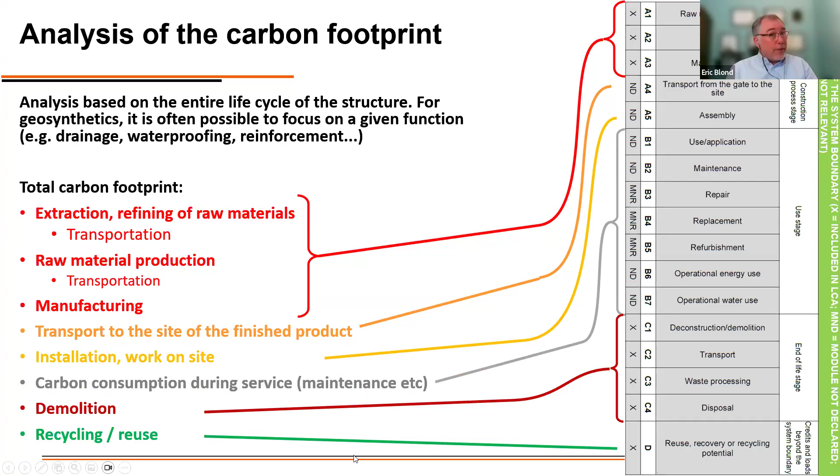After that, we have A4, which is the transportation from the plant to the site. After that, there are other aspects: installation, consumption during service, demolition. And if we're able to reuse the product at the end, if there's a path or stream for recycling and reuse of either the product or a component of the structure, then we get some bonus points. That's how we can have neutral carbon structures, or sometimes positive carbon structures.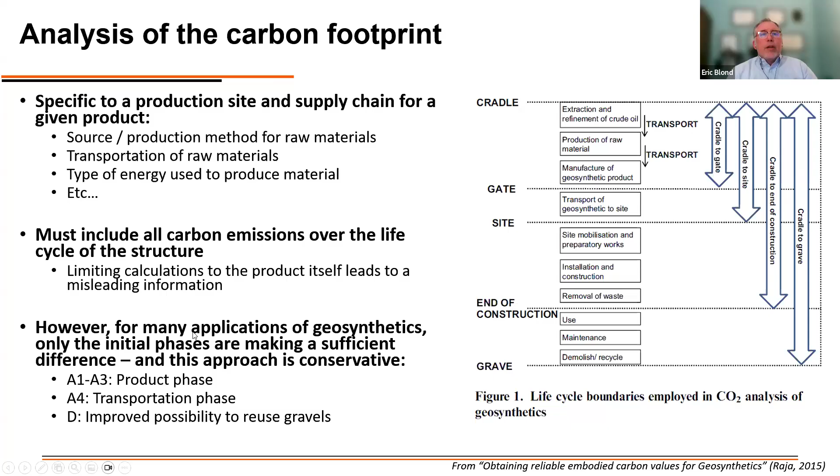All this is specific to a production chain, to a manufacturer, etc. We must include all the aspects of the construction. If we look at what's happening with aggregates—because for resin, everybody realizes that it's oil, which is refined, converted, etc.—for aggregates, there is also some carbon. We have to drill, crush, haul the gravel, install, level, compact. All of this has a cost.

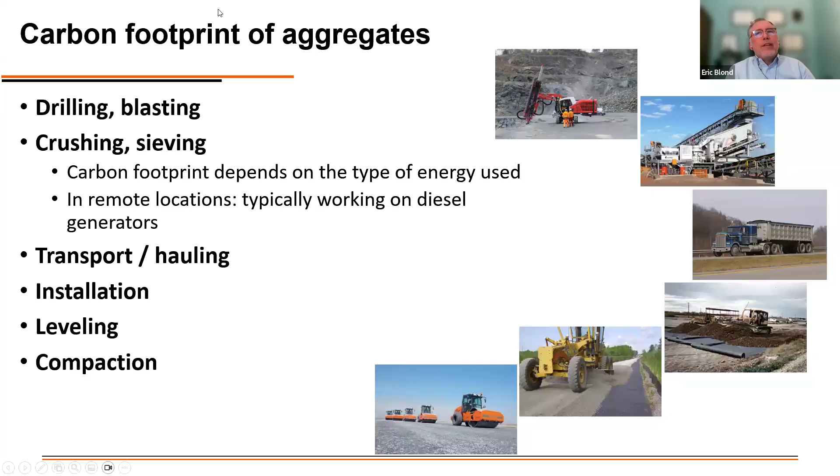For carbon calculation, I've used as an example arbitrary information: 40,000 square meters of structure. And I thought, okay, let's establish an equivalency between geosynthetic and gravel. So I looked at whether I'd need 100 millimeters, 150, 200, 250, 300, or 500 millimeters of sand or gravel to have an equivalent function as the geosynthetic. So I've calculated them all.

To produce the gravel, we have a given quantity of carbon which is mobilized, and that's why you have all these layers here—it depends on the structure. Then, to this quantity of carbon embedded into the gravel, we need to transport it to the site, and transportation will depend on the mileage and on the quantity, because the thicker the layer of gravel, the more trucks we need to transport it.

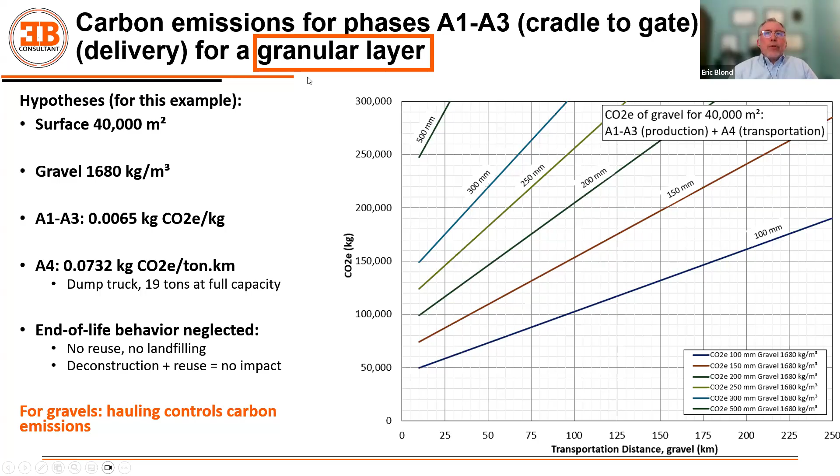That's for the granular layer. Now I'm going to do the same for geosynthetics. Soon, geosynthetics will have EPD, environmental product declarations, to inform users on embedded carbon. This is something which is developing. In Europe, they have many. In North America, I've not seen a lot so far. I don't know how it is elsewhere, but it is coming.

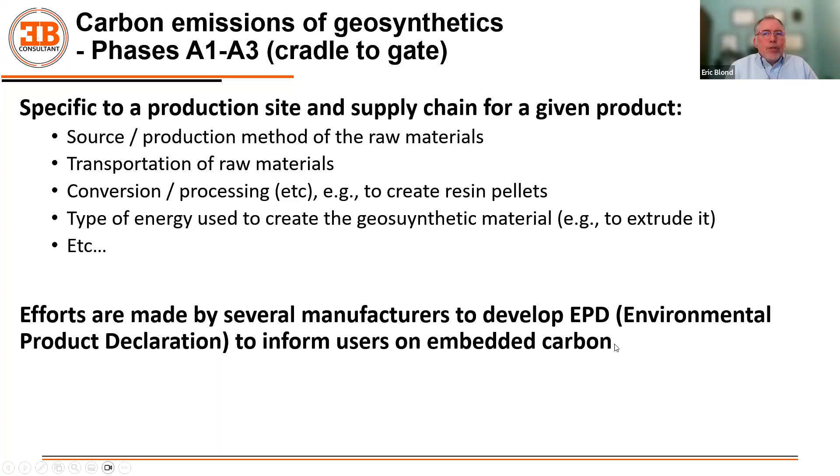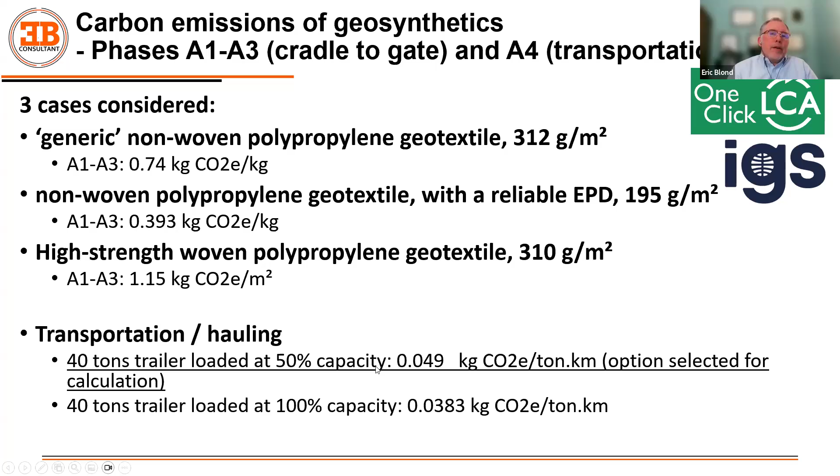I use three cases. As I said, the embedded carbon in geosynthetics depends on the manufacturer, on many parameters, the production technique, etc. You can see that the quantity of carbon can vary dramatically between products. Here it's 0.4 kilogram per kilo, here it's 1.15 kilograms per square meter, etc. So it's a lot. Transportation also, I've considered that only 50% of the truck was used. That's something you can play with.

That's important, because if you compare the embedded carbon for the structures I'm comparing, one is gravel of different thicknesses, the other is geotextile. Only for manufacturing and transportation, we can see that in the worst possible scenario, if we have 100 millimeters of gravel replaced by the worst possible geotextile, after about 8 kilometers, we have an equivalent carbon consumption. And we still have the additional benefits of geosynthetics, the tensile strengths, etc. That's completely independent of the hauling. We can bring the geotextile from 2,500 kilometers away, probably even more, half around the globe, and it's still going to be less carbon intensive.

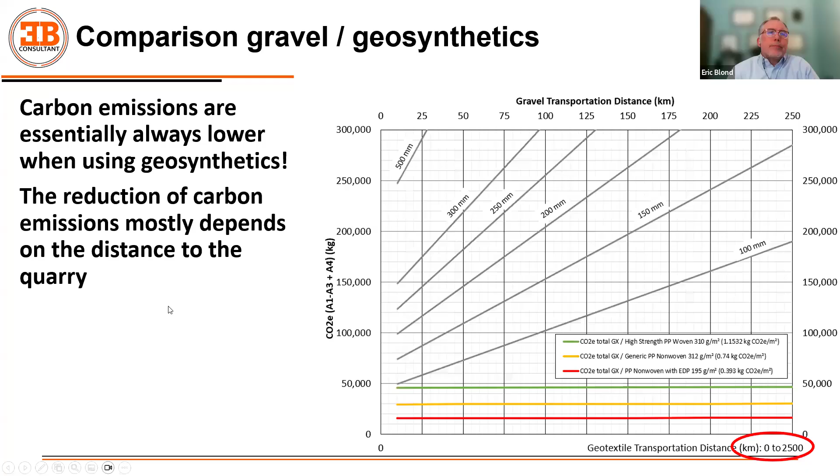I'm going to skip some of this because I'm missing time, but in the literature there are more exhaustive studies which have been done. I picked one here which shows that accounting for everything - not only the product and transportation but also installation, considering that whether you put 100 or 300 millimeters it's probably still one pass of compaction - we still have about 10 to 15% less carbon emitted when we use geotextile for stabilization. Here, it's a high-strength geotextile for stabilization. We still have a significant reduction of carbon emission, consistent with what I told you before.

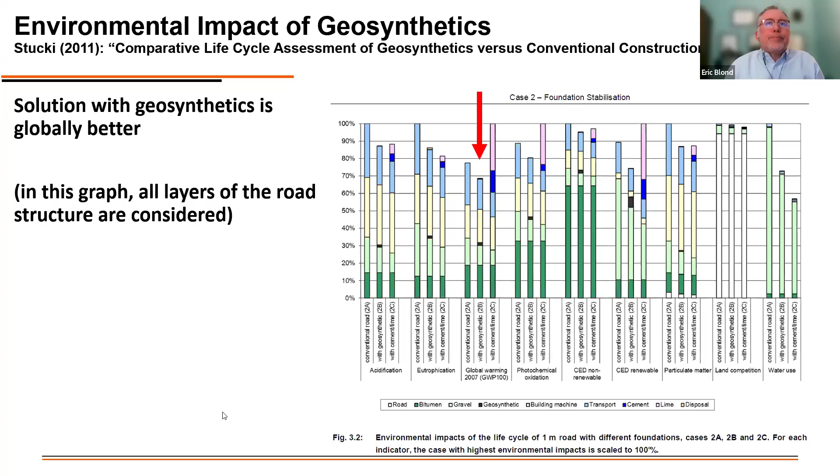A 0.5% saving globally would be what we would get if we manage to be 100% successful on replacing gravel in our structures. All this to realize that, in fact, transportation is really the problem for gravel.

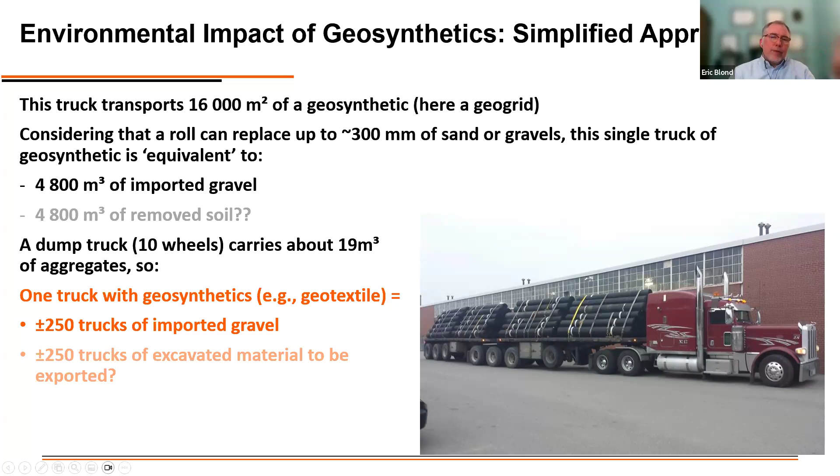That's how we can, if we want to simplify everything, find a solution. One truck of geogrid here is covering 16,000 square meters on the surface, and this truck is equivalent to about 250 trucks of gravel. Obviously, there is less carbon in the geogrids because, as we saw, it's transportation which is going to drive the carbon costs for gravels.

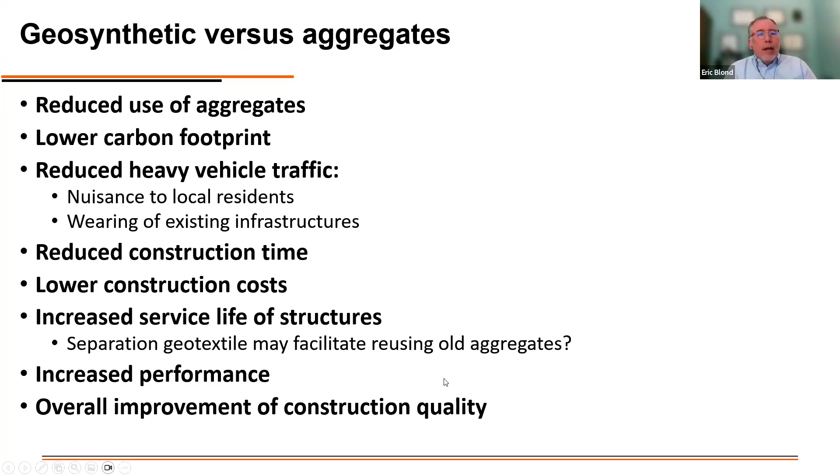One thing which is interesting as well: if we have a separation layer between the clay or subgrade and the gravel, even if the gravel foundation is damaged by compaction or fracturing, it may still be more usable than if it was contaminated with clay. So there is no question here - we have another benefit we have not even considered, and we have better performance and overall improvement of construction quality. But all this is only possible if we have good design and good installation, obviously.

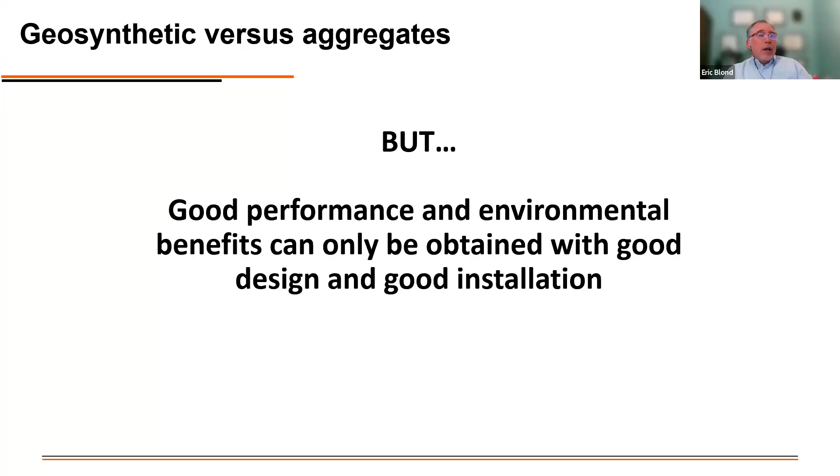That's not good, simply not good. So I think we have to realize that we've changed a lot already in our ways of building, and we will continue changing. As a geosynthetic industry, we are really in pole position to take much more space. So that's what I wanted to present. Thank you very much, I'm a few minutes late, I'm sorry.

Thanks a lot, Eric. Yeah, that's okay, I think it's just about 6 minutes late from schedule. Let's have one or two questions. I know Jonathan is probably eager to ask some questions. It's very, very interesting, especially towards the later part of the presentation on the carbon side. So, Jonathan, if you have any questions.